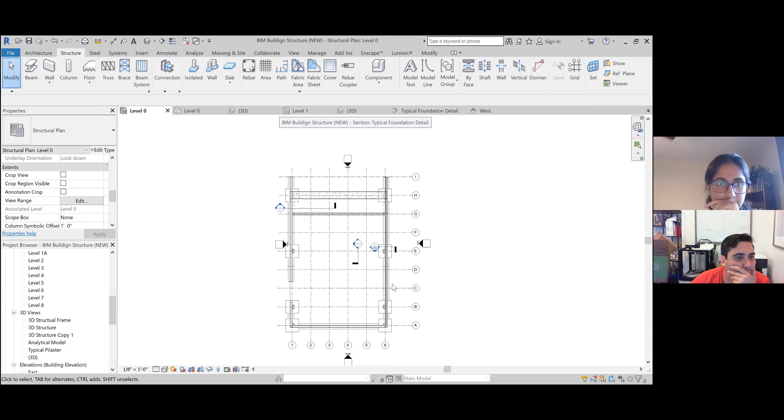I was able to get the reinforcing fixed on the walls and things like that, and add the shaft wall. I was just copying and pasting it, I didn't go to Modify from my other Revit file, I wasn't clicking Modify. That's why. But I just had a question.

Down here I'm not exactly sure what's going on. I was trying to create the key footing. This is my floor slab. I don't know if this was placed over by accident there. Yeah, it looks like that shouldn't be there. Is there more than one there, or just one?

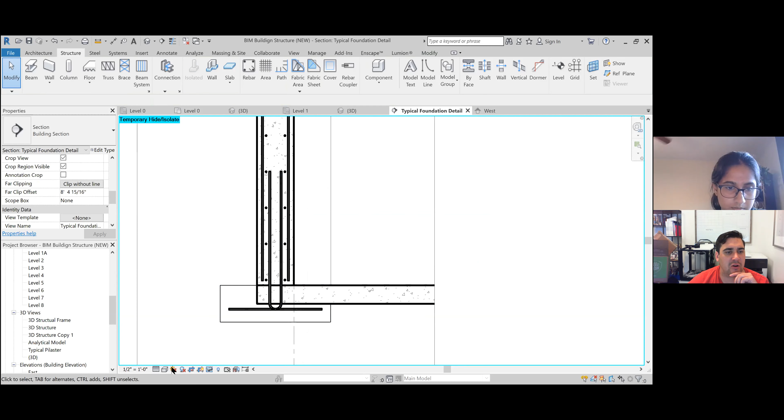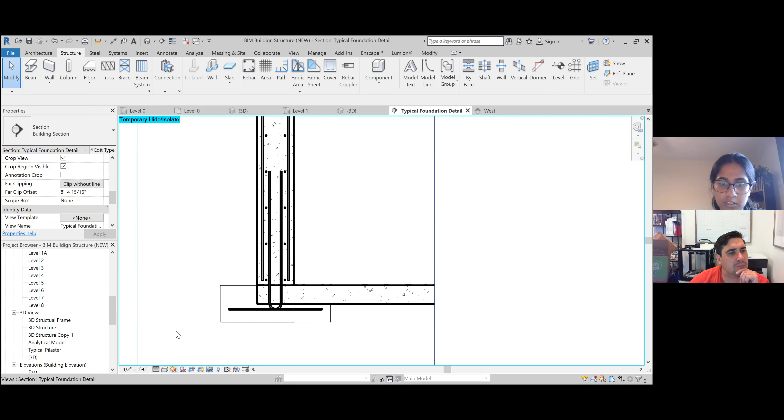There's just one. So you'll probably want to create the footing based on that concrete column. I think the footing is there. I wasn't sure because behind this is the footing over here, the 84 by 84, and behind that is the smaller footing.

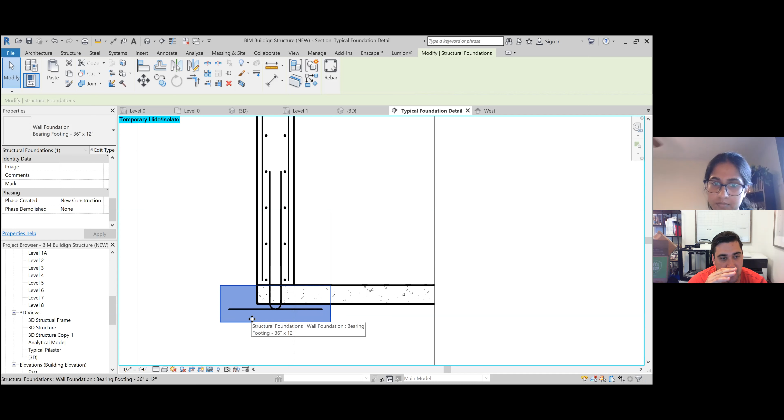So should I create the key footing on the floor slab or this 36? The first thing is you want those footings to likely be below the floor. Your wall should actually go down 4 to 6 inches, depending on the thickness of your floor.

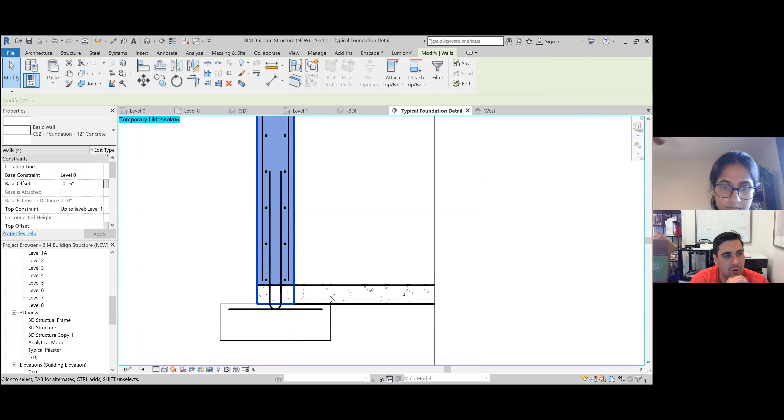So that will go down below the floor. I think this floor is 6 inches, so all the walls would go down below that, and that way your footings won't stick up into the floor. Okay, let me just... and then all of these guys right here, they'll go down 6 inches as well.

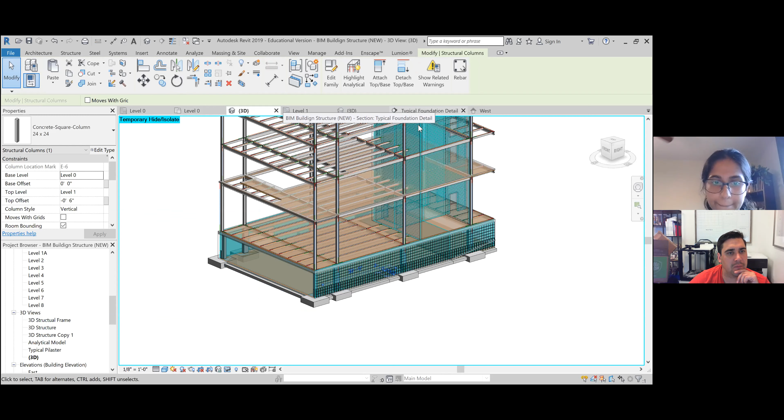You can actually, in that same view, right click and select all instances in project. Oh really? Yeah, select all instances in the entire project. Okay, and then this one, -6, yeah.

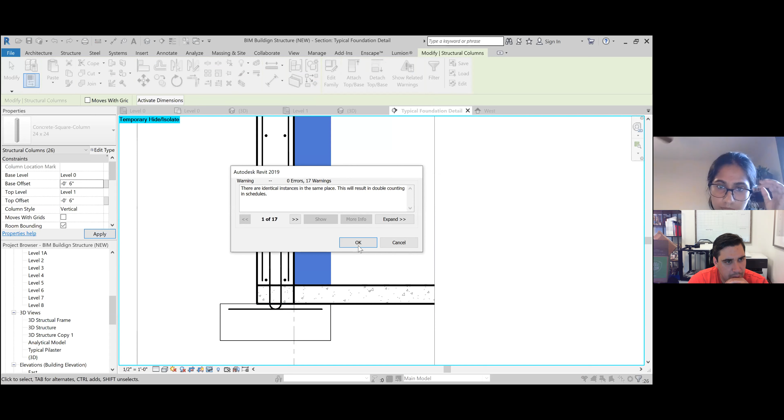Your big footing, there's a couple different ways to address it. Probably the best way is to right click on the big footing, go to Override Graphics in View, and go by element. We want to turn the transparency to 100%, then click OK, and now you'll see your little footing in there.

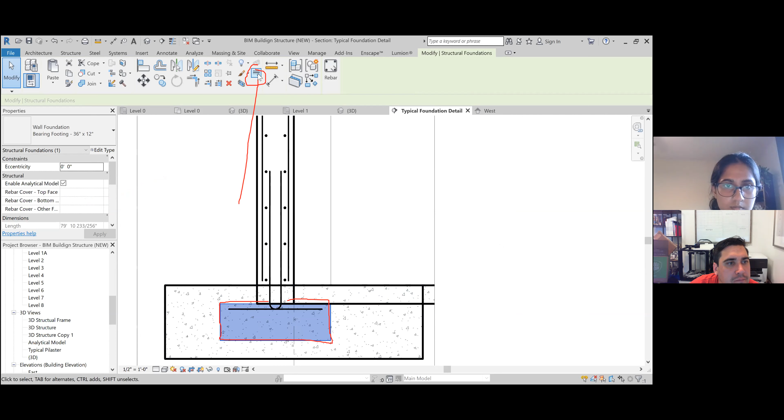Then what I would do is make the little footing dotted lines. Just go Override by Line Work, this button here, and select Hidden Line. Then click all these lines of the footing, and this one as well. That way you can see there's something beyond, but it's not obstructing the view.

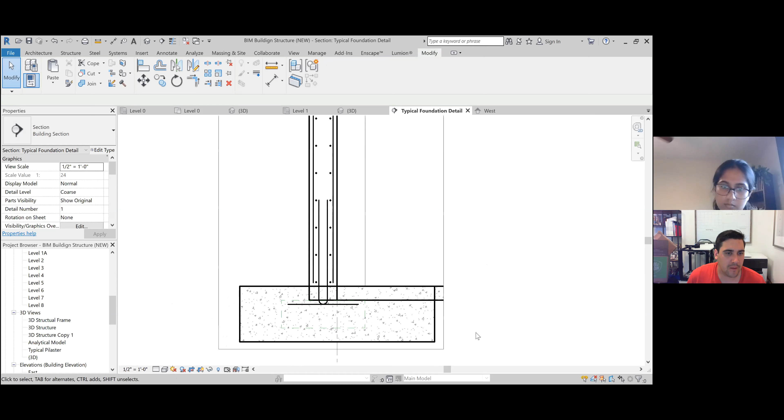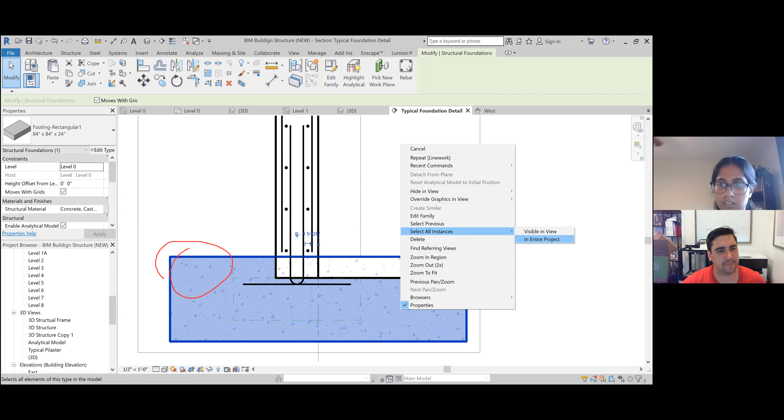It looks like these big footings aren't attached to the column, they didn't lower with the column. So maybe select all these instances, select all the instances of the footing in the entire project, right? Yeah. And then make those -6 inches. Okay.

Okay. And this wall, is it okay? Your floor would be on the inside of the wall.

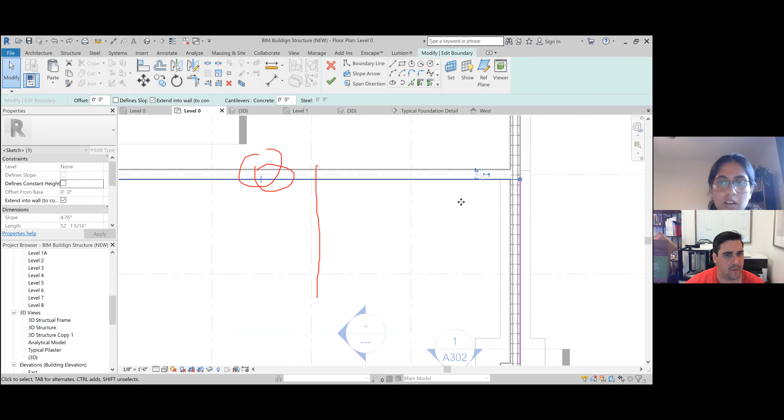If I go to pick wall, you should be able to just click this little arrow button there. Click one of those lines and then push that button. Okay, cool, and then it should move them in. Yeah, now it should move them all. Okay, cool.

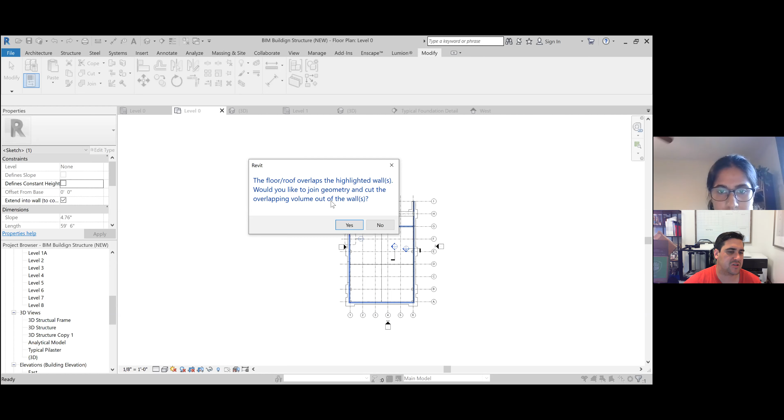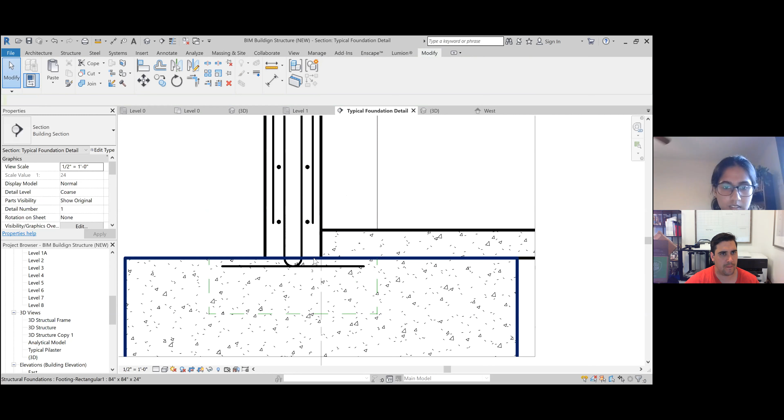Okay, and now I can make the footing over here. I'm just trying to think how I did it last time. Did a structure, is it rebar? Yep. And then sketch.

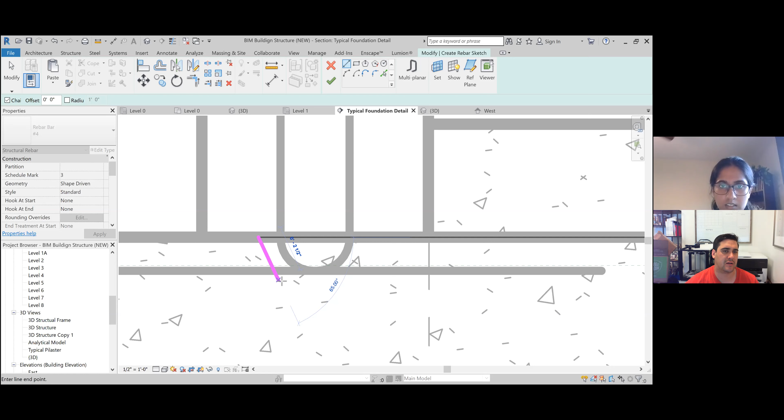What shape are you trying to draw right now? Like on the video it was just like a backward upside down trapezoid. Oh, the key. So yeah, for a key, you want to hit the X button there. So the key is not reinforcing. Click the X button up on the top here.

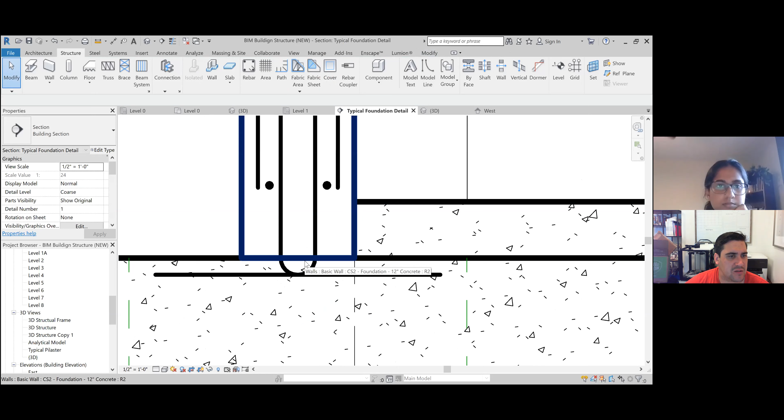And so I think there's a couple different ways to do that. Probably the best way is to go into view. Oh, sorry. Do you know how to remove the top part of this? There should be an arrow that lets you push it up, lets you push it off. Okay, that'll work.

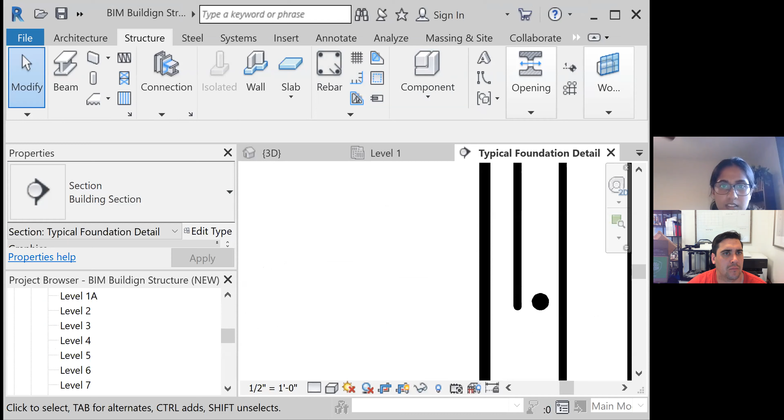So go to view, and then go to cut profile on the left. And then click that. And then draw. Oh, and then, yeah, just like 2 inches.

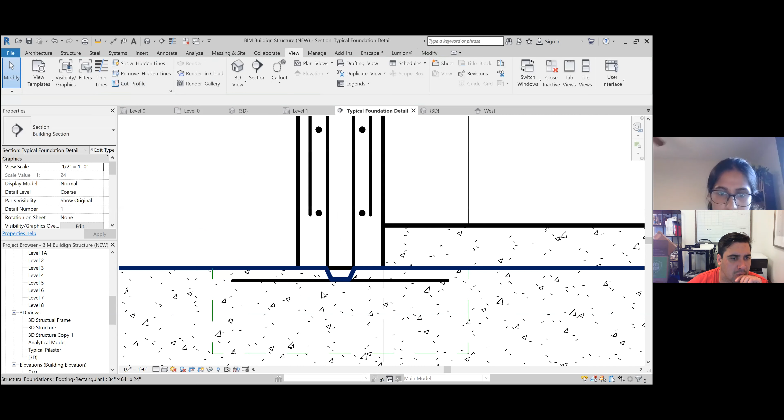And should I move the rebar? I have to add rebar down here as well, right? Yeah, so you just probably want to move that rebar down. I guess ideally what you want to do with this is show that rebar should come all the way down to the bottom of the footing. This one? Yeah, both of them.

They're probably down somewhere. No, keep them in the small part here because it looks like we should have done the reverse. I think this big column should have dotted lines, or this one should have been solid. Yeah, I think that's just the way we're cutting through it right now.

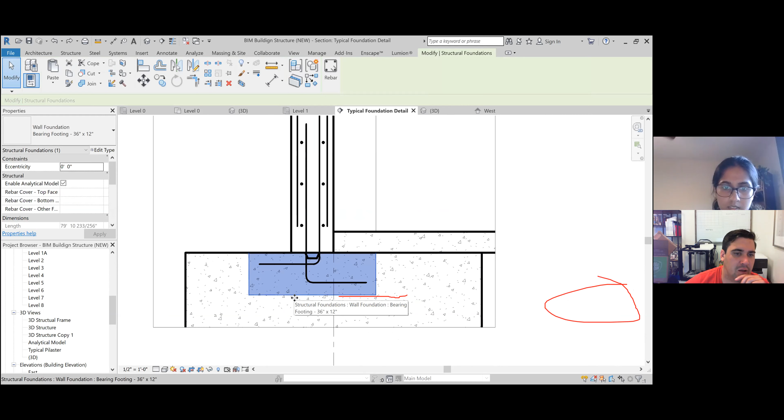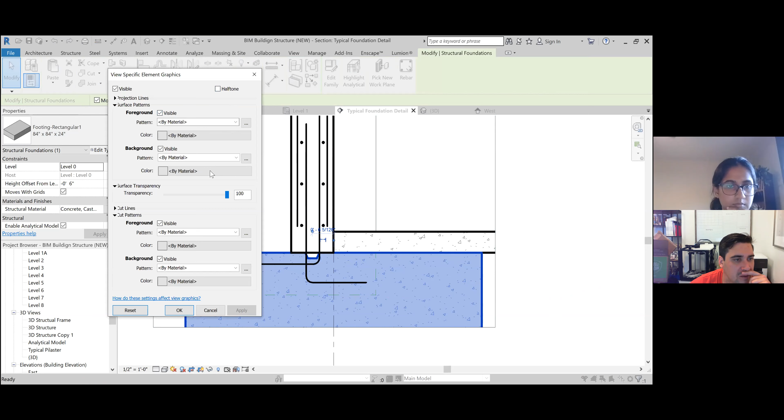So let's click this big footing for a second and go to override graphics in view, the little paintbrush. By element, and let's change the cut pattern to be solid white. So just change the pattern there and make it solid fill, and then change the color to white. And then click OK.

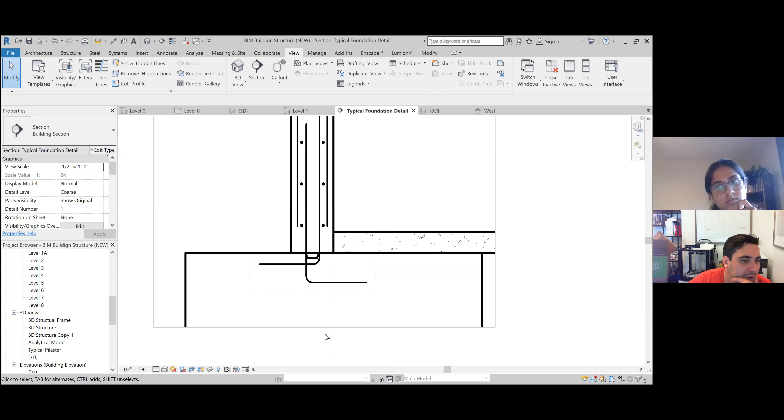And then, can you re-change the line for this? Or yeah, you can go back to by category. Yeah, click all those lines.

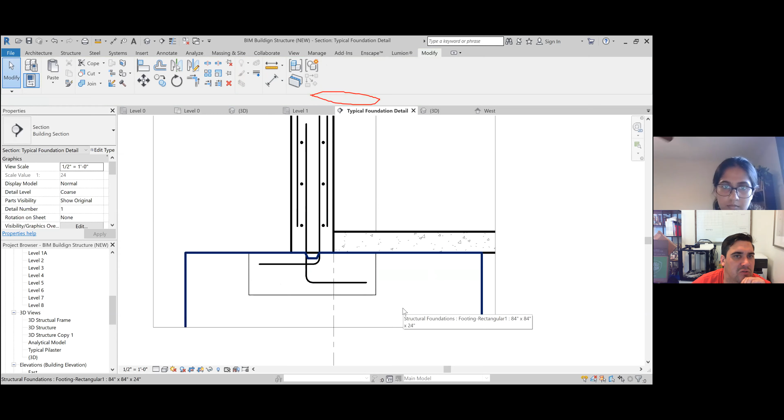One thing I think we'll do is go back to your level 1, your level 0 for a second. Go to where your section is, and let's move your section so it's right here. Yeah, there you go, that'd be better. Okay, yeah, that would be much easier. And then this shows as just a line outside.

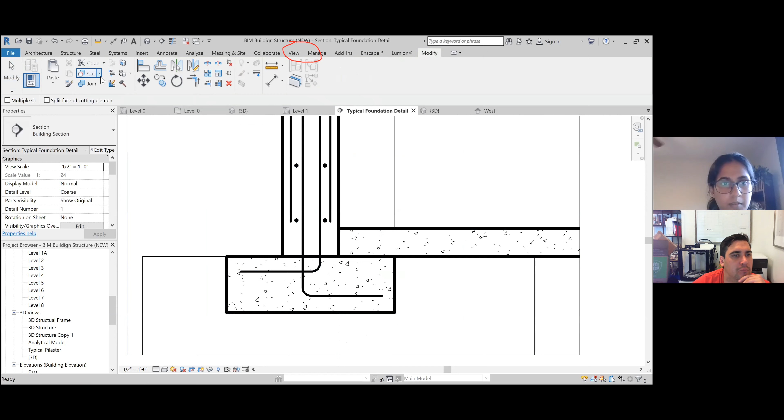Oh, would I have to remake this then? I think so, yeah, okay, this one. And then to make that again, I would go into cut right here, view. What is it? Sorry, view. View, and then cut profile.

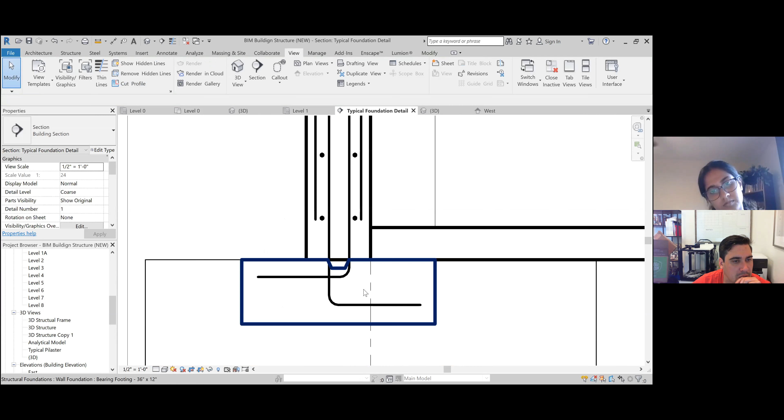And then go to modify. I guess the other thing you could do is do a cut profile for the wall as well. That might be a better way to do it. So go to do cut profile again, under view, and do the profile for the wall now.

Yeah, and you can just click pick line, and click the check mark. And zoom out there for a second. Why is it not letting?

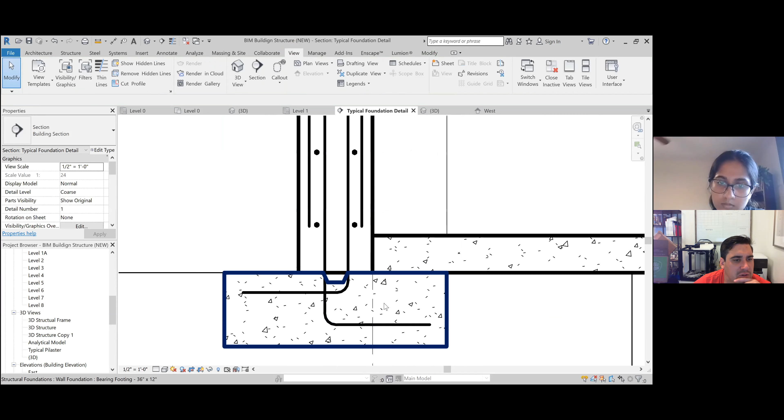Okay, so let's go to modify for a second. Click linework. And let's go to invisible lines. Okay, and let's click that line and make it invisible. Yeah.

And then I just have to add, let me see this. I have to add rebar down here real quick. Yeah. Structure, rebar.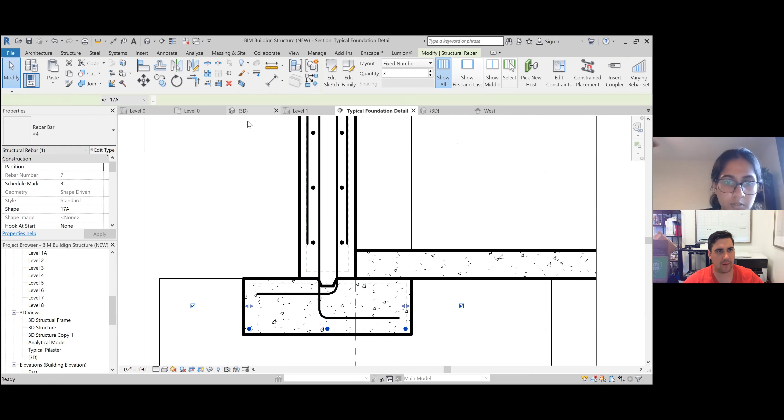How would I know like this? Oh, this is just fixed, and then if I go to 3D, would I have to extend? Those hooks look like they're already extended down in there.

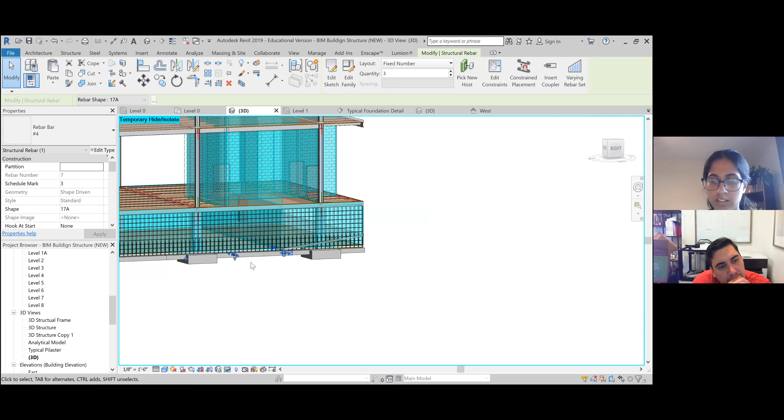Because now I just wanted to copy and paste it to each side, each wall. So would I have to select each one of this and then rotate it? Mirror it probably, it's probably the best. Sometimes that might not work out though, and you sometimes just have to recreate the rebar on the other wall.

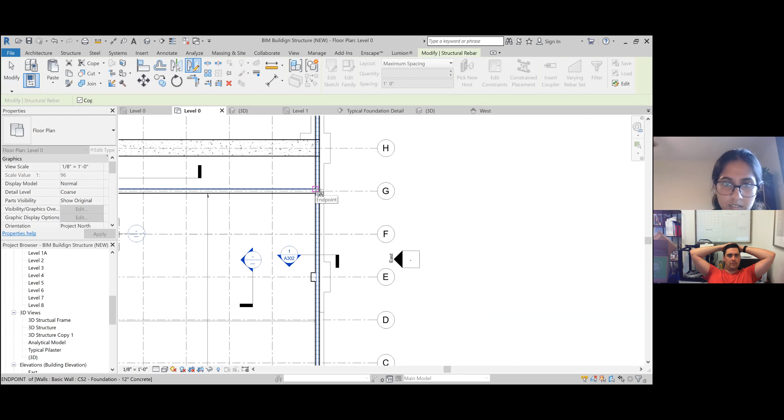And then mirror it along the corner, I guess. Use the other one, the mirror command to the right, yeah. And then go to the corner, right here. You probably want to mirror it along this edge that way. Go down to the bottom corner first. Actually, let's try that one first, that might be easier to explain.

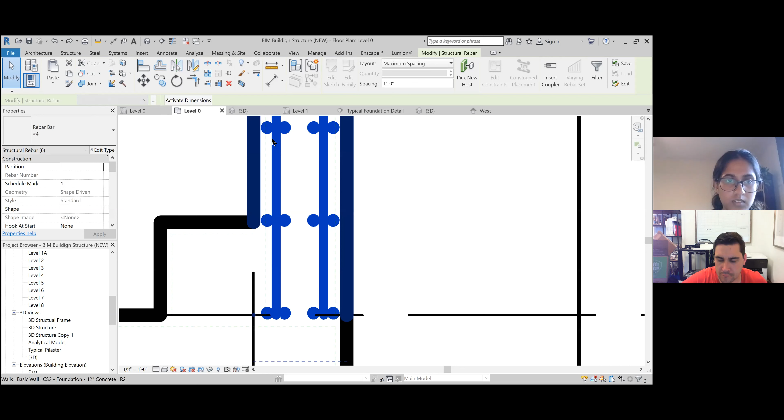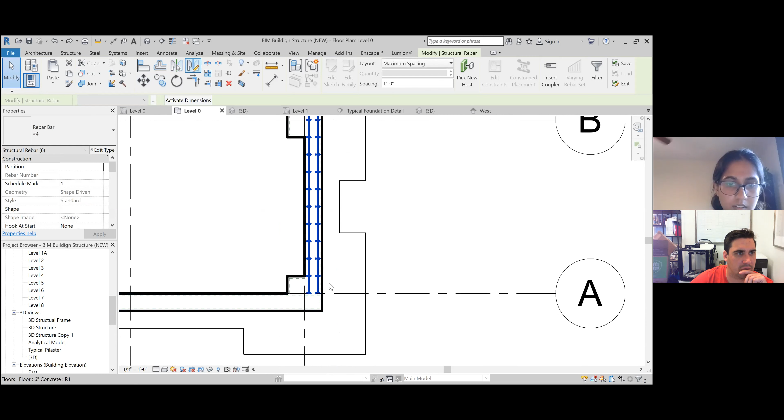So select all your rebar. Copy. And then you said this one, yep, and then go down to the bottom corner. Go down further. Click that corner, like this one, over here. Sorry. Yeah, that's fine. Click that, and then click that corner and go out on a 45-degree angle.

135 is the number you're looking for. It'll be sometimes 45, sometimes it'll be 135. And then I would just extend it accordingly.

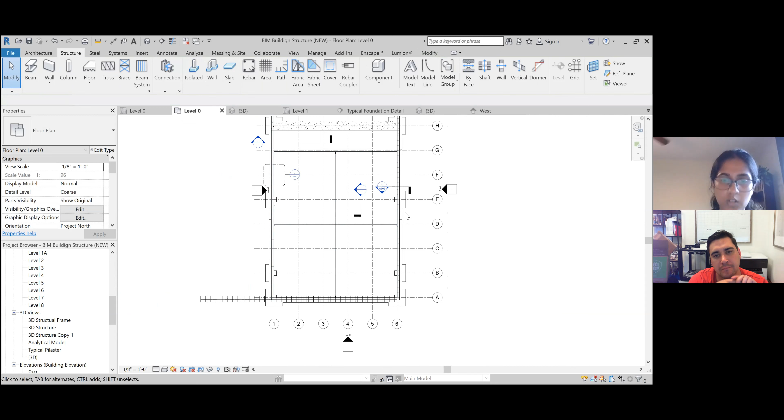And then for this one, which has the car entry, I would just do it twice, kind of, and then split it. That wall might be easier to just redo from scratch. Then it'll automatically go around the door. Okay, that sounds good.

I just had a question. So for the joists, they only go on the roof, right? Correct, the joists? Yeah, because I redid it. The joist should be on every floor. On every floor, okay.

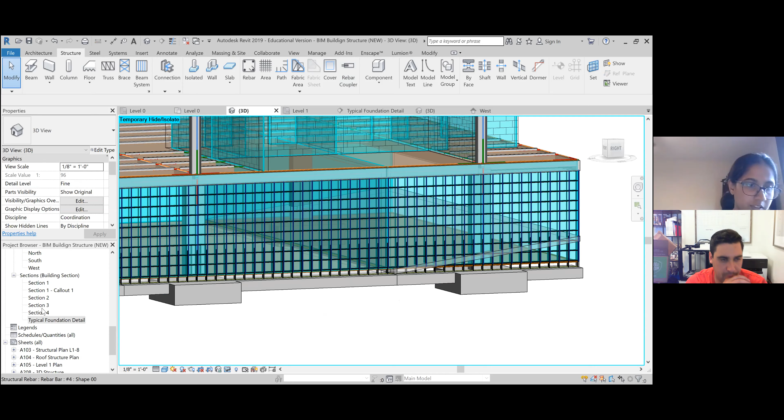So I just wanted to check this looks correct. Yep, that looks good. Okay, so I'll just copy that on each floor.

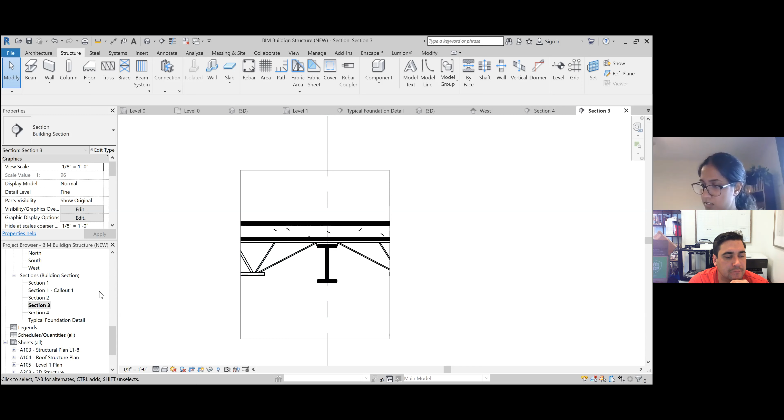Then for some reason, this door is not going on each floor for some reason. Is it because my 3D model over here probably didn't have it? Potentially. Is it a door or is it an opening, or what is it? Yeah, it's like an entrance to the stair. Well, how is it modeled? Oh, it's just an opening. So just click that opening.

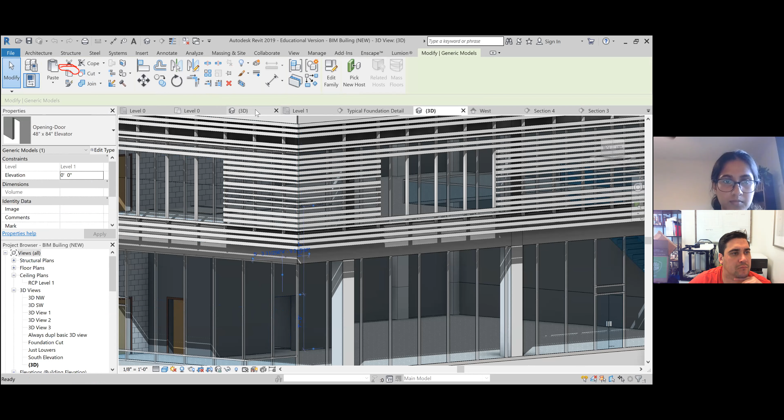Yeah, it's a door opening. Click the copy button up here and modify, and go to paste to selected levels. Okay, and then I would just do it. Pick 2, yeah. That's fine, click OK.

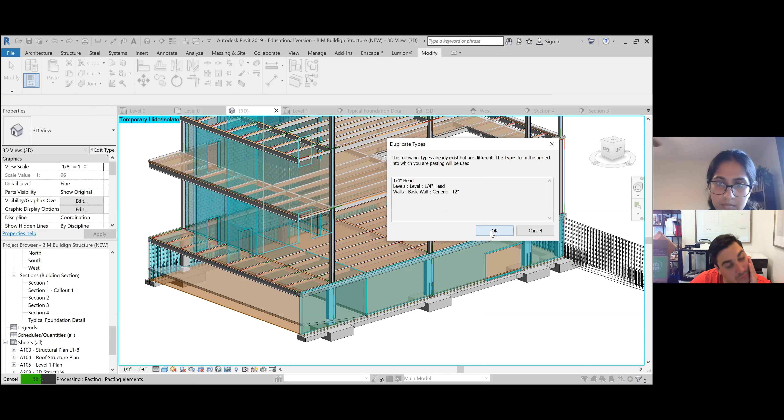Did it create another wall? Nope, okay, and I'll just do that. Same with that one.

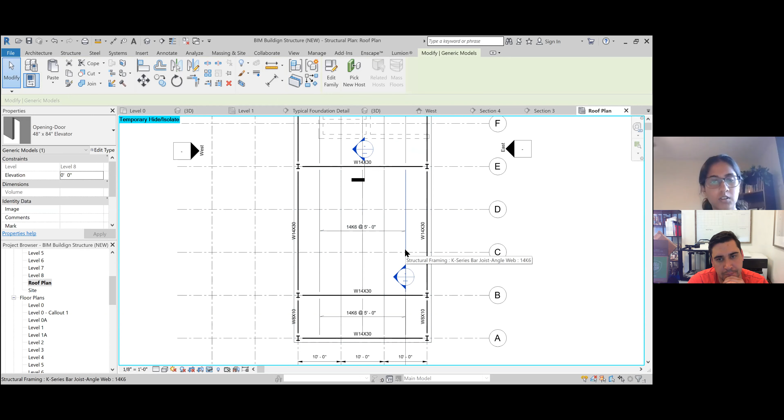And for the beams, it's like a lot thinner, like for example on my roof plan, some of them are a lot thicker, and then these ones are a lot thinner. So I'm just curious why that's happening. Joists show up thinner because they're like an intermediate span, whereas the beams are thicker because they're a bigger element. Okay, because on my level 1, for example, these are like beams.

So I don't know why. Because last time I did it, it was fine. It was, for some reason... Is your floor there? Oh, I know, click, go scroll down.

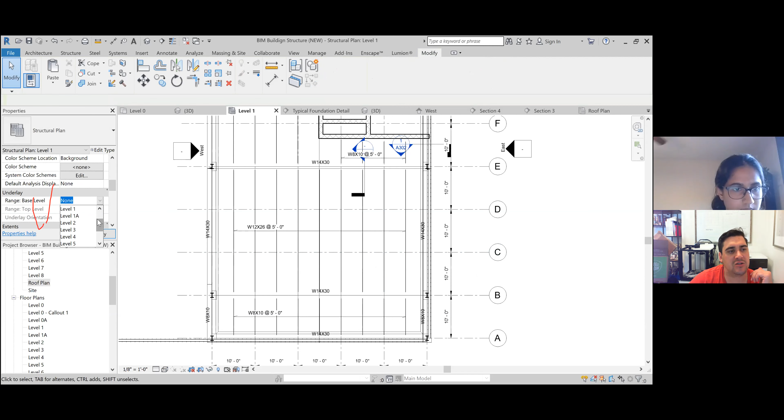Also my floor is showing up in my regular plan, but not in my structural plan. Go over here and scroll down to underlay. Oh, you have none on for underlay. Okay, let's scroll down there. Click, no, you don't want that, you don't want underlay. Underlays should only be used temporarily, they should never stay on fully. So let's click your view range.

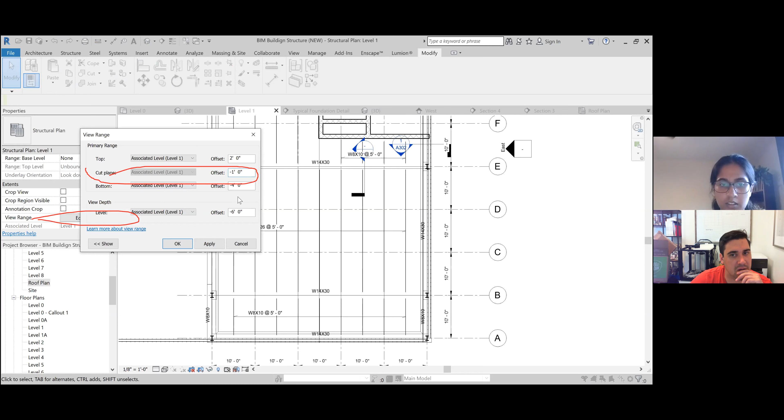And yeah, that's probably why. So let's change the cut plane to be -1. So when it means cut plane, it means like where it's taking the floor plan, basically. Okay, make that -6 inches.

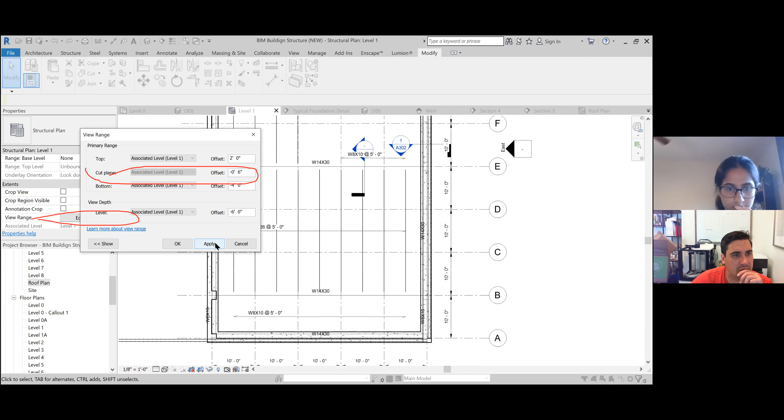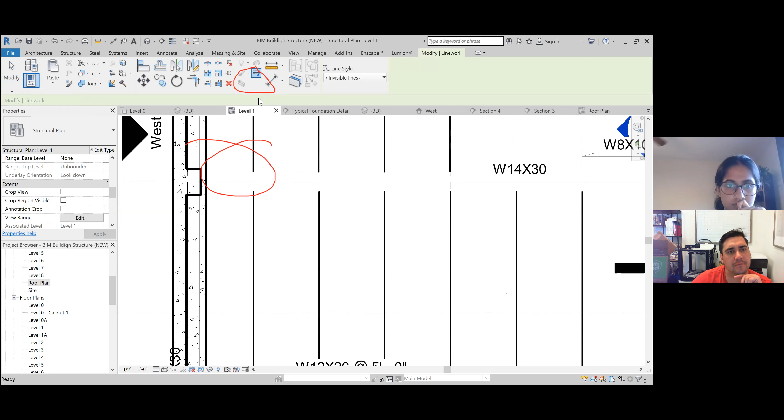So that's more in line with what you should be seeing. Click OK. Zoom in farther here. Yeah, the other thing you can just do, I don't know why your beams aren't showing up thicker, but you can just go into here and go to override line weight and go to wide line. And then click the beams, just this one, not the joist. Yeah. And then this one down here. Yeah. So that's one way to fix that.

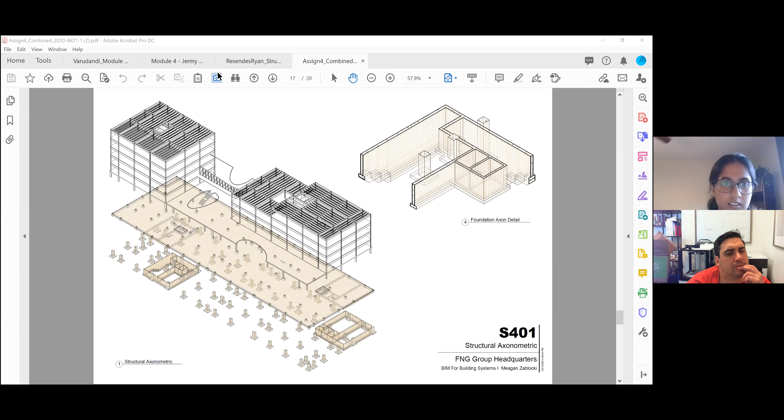Okay, and all these are actually beams. So should they be joists instead? Yeah, they should. They should be joists. Okay. Okay, so I'll work on that then. And I just had a question, can you still see my screen for like a PDF? I cannot see the PDF. Okay. I was just wondering how to get, I think this person colored in each thing separately, so it's more visible, you can understand it more. So I was just wondering.

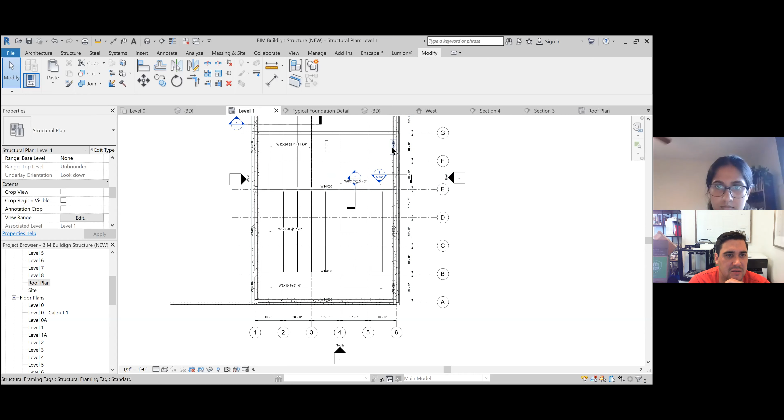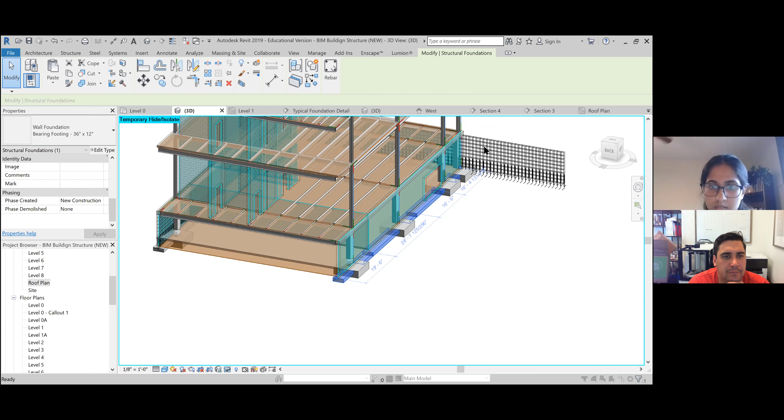So just go to your 3D or go to a detail or something. And it's all actually the override graphics. Go to your 3D view for a second, and I'll show you how to do it there. So click on your foundation, your footings, right click and go to override graphics in view. And go to by category. And let's change the projection lines at the top there. Let's make the projection lines red. So pattern, click that, solid. And let's change the color to red.

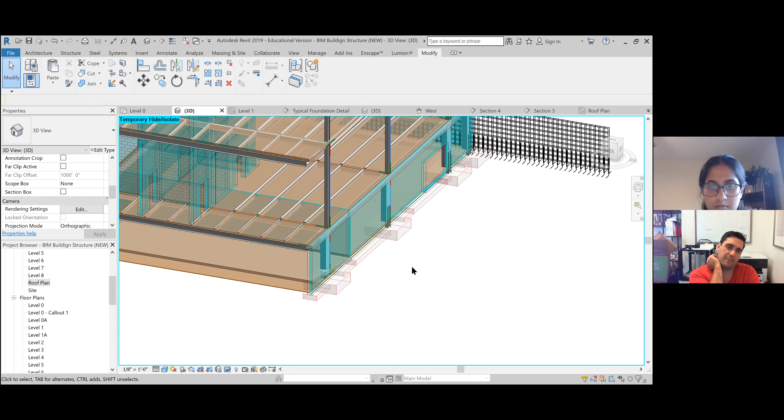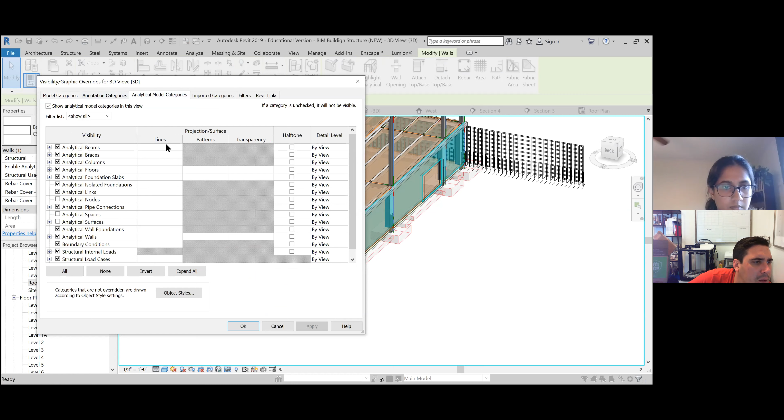Okay, and then let's change the transparency to 100%. Or let's change it to like 80%. And then click OK. Oh, okay. So that's how they basically override all that. Okay, and is that the same reason why these are all blue and different colors? I think those are, click VG on your keyboard. VG. And go to analytical model categories at the top. And yeah, just click at the top, the thing that says show analytical models in this view, uncheck that right above where your mouse is. Yeah. And click OK. Yeah. So those shouldn't be showing.

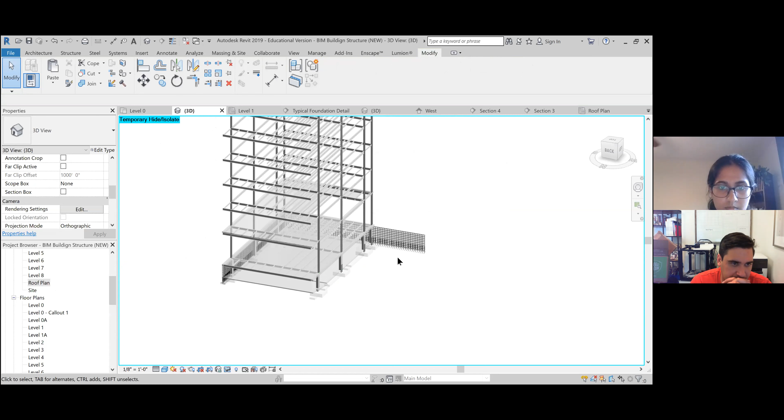Okay, and then if I want to change these another color, I just right click it and then by category, and projection lines, and then? Yeah. You can make them orange or something, or green. Would I hit solid? Solid. Let me just try green for now. Yellow is a bad color to use, so just stay away from that color. Okay. Yeah, and the other thing you might want to do is add a transparency to those, just so they're not as visible. Also with graphical stuff, you probably want more muted colors. It's obviously a bit bright.

So if you go to, where's my thing here? Go to this tealy color right here, and just go there. That's actually not that great. Go to one of the other greens. It's lower. And then just change this to up here. And then move this so it's down into the more gray area. Yeah, something maybe up a little bit higher. Yeah, do something right in there. That's fine. Just click OK. So I try to find more muted colors when I'm doing structural stuff. It's just not as in your face.

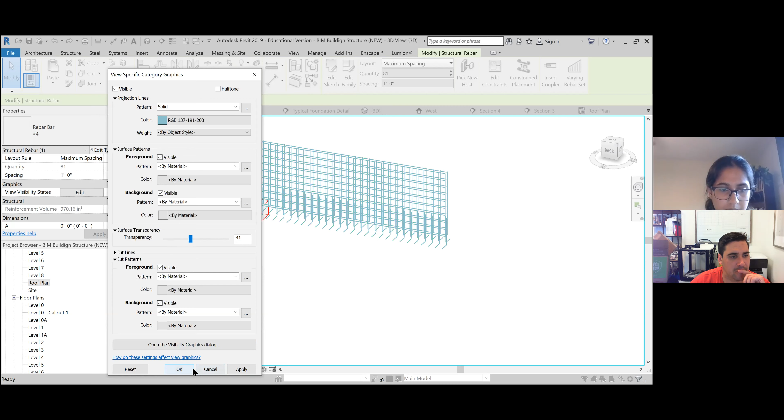Okay, and then the transparency. For this, would it apply? Because I'm not seeing any changes really. It should apply. Surface transparency. Maybe it doesn't. I don't know. Maybe because it's one line. Leave it on 40% for a second. The problem is we're not really looking at anything that's transparent, right? So click OK. And then look over. I think it was just this. No, look more over here, because there's nothing behind that, right? So you won't see a transparency. Yeah. No, it doesn't look like it's transparent. But anyways, that's kind of the idea. Try to pick muted colors for the most part.

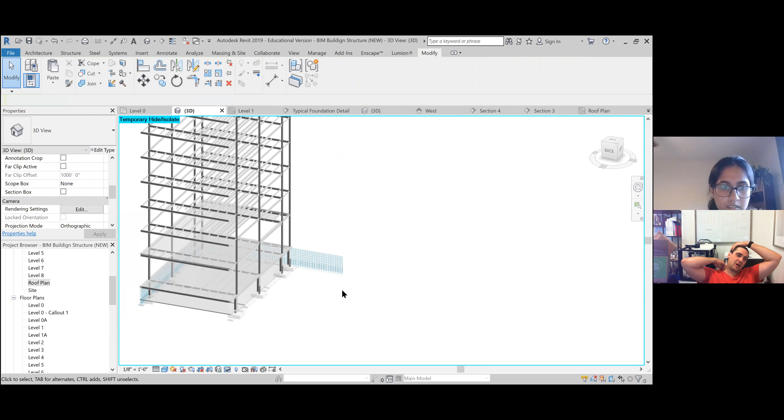Okay. Well, I think that was basically it. And after I finish this, could I submit on Wednesday? I can be done by Wednesday. Okay, that's fine. Sure. Yeah.

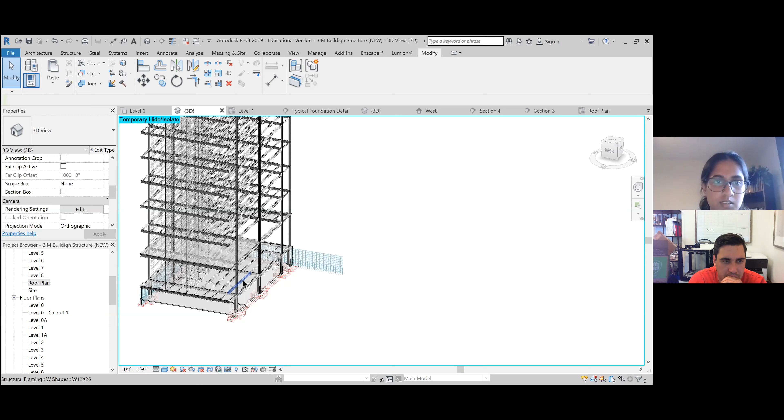Yeah, same kind of concept. You want to make sure everything is underneath each other, right? Yeah. Okay, that makes sense. And I think I was just having trouble with, for example, this: I actually just offset the floor. I just made it as a floor because when I was getting it as 0, and then when I was trying to move the whole beam system down.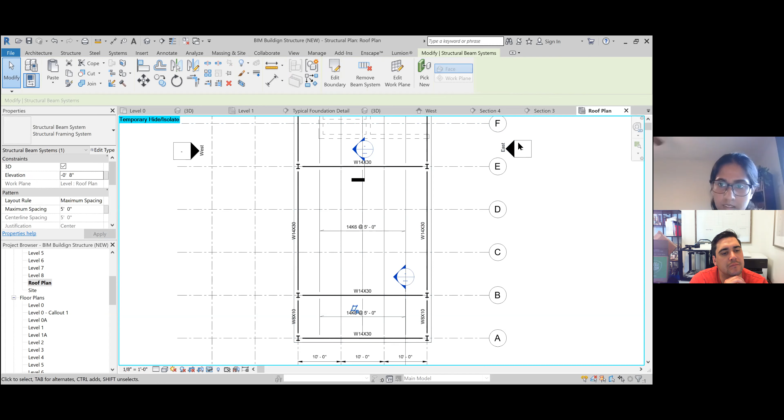What was that? You have to move the whole beam system down, not the individual members. So would it be elevation? Yes. So then I would hit negative. Yeah, negative 8 inches. Okay, and then the beams themselves, you have to lower the start and end level offset. So do negative 10 inches.

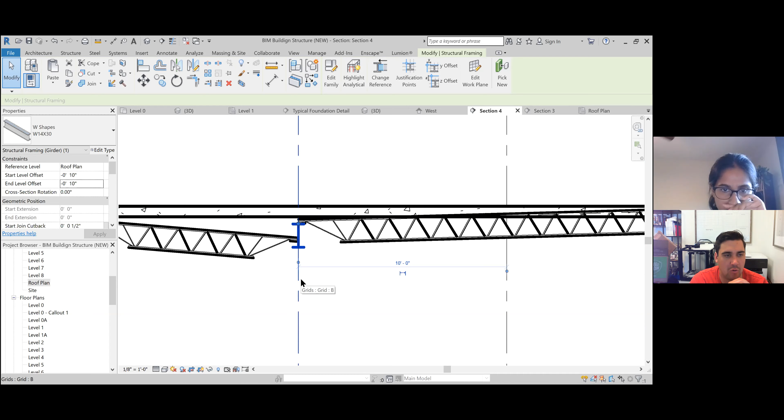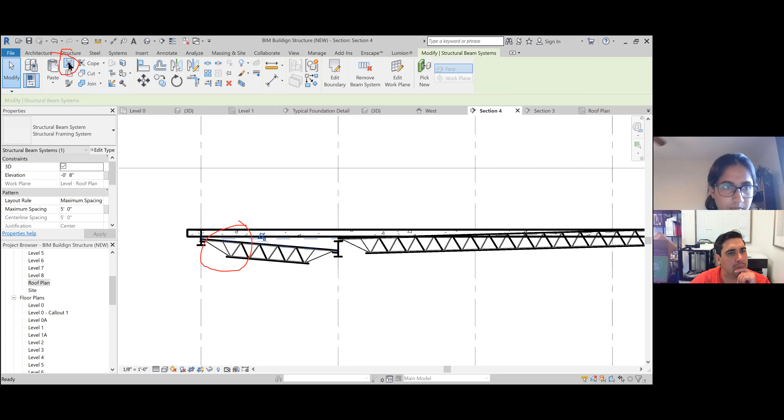Yeah, so this was happening. So go to the beam system for the one on the left. No, redo that. Now go to the beam system for this one. Select the beam system. Oh, okay. How do I select it? And then click the cut button. And go to paste on selected levels. Roof plan.

The other thing, we can go pick new host. Should I hit 0? No, pick new host. Or hit escape on the keyboard, or click work plane. Sorry. Okay. The beam system. What do I do? You have to click the beam system, not the joists. Oh, yeah. And go to pick new, and then go to work plane. And then select name and select roof plan. And then click OK.

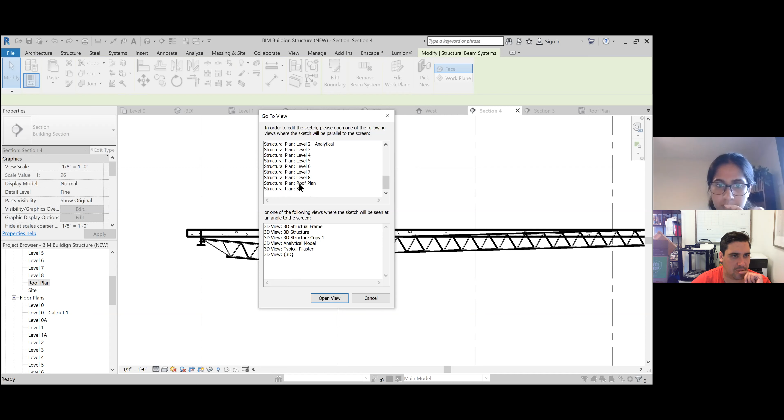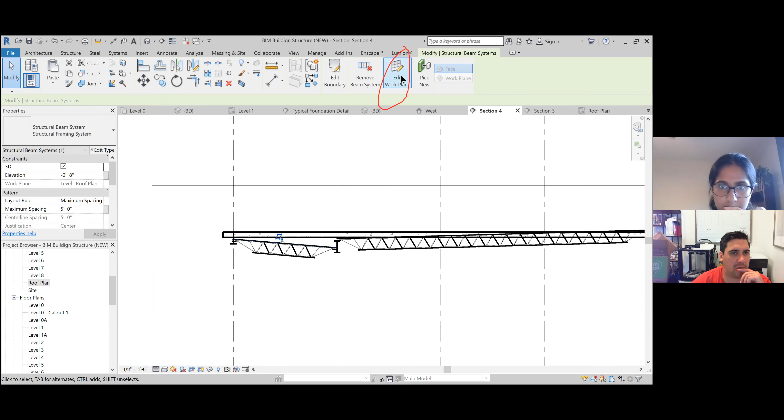I go to roof plan, and then just go back to that section. So then would I just click it right here? Yeah. Go back to your section. Click edit work plane, and click pick new host for a second. See if that does anything. Or you could try hitting dissociate. No. Okay, let's try one more thing.

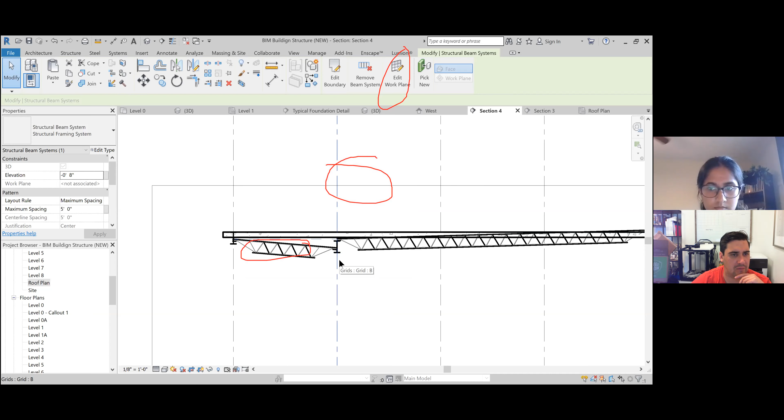So click this beam and cut the beam and paste the beam in the same place. Select this beam? Yes. And you said cut it? And paste to selected levels. Then paste. There you go. Because for some reason the structural beam system is attached to the top of that plane. So you suggest what I first do is lower all the beam systems, and then cut and repaste it? Yeah, that's probably the best way to do it.

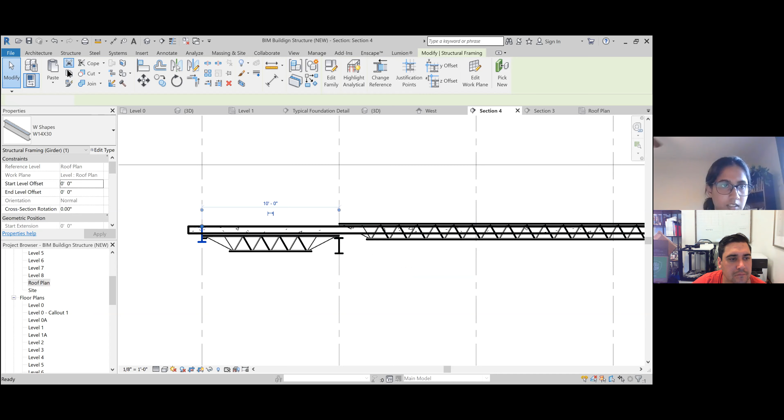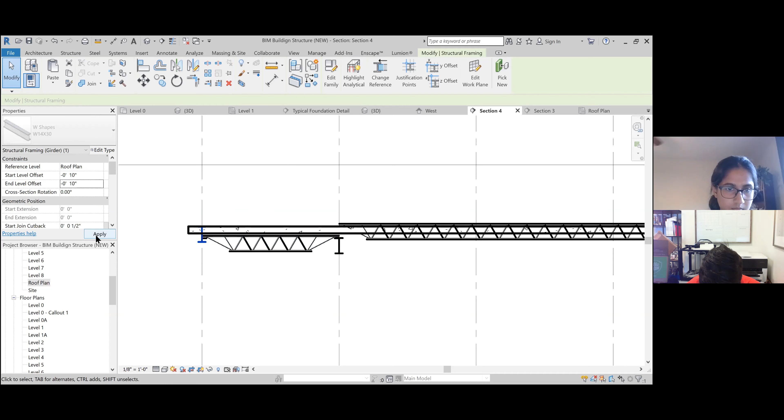All right, let me just try this one real quick. Cut and then, oh, this didn't do it. No, it did. So now change the level. Should I select it and then? And put negative 10 inches. Oh, and then I would have to do the same thing. Right, so cut it now. Okay. Yeah, these little things I couldn't wrap my head around how to go about.